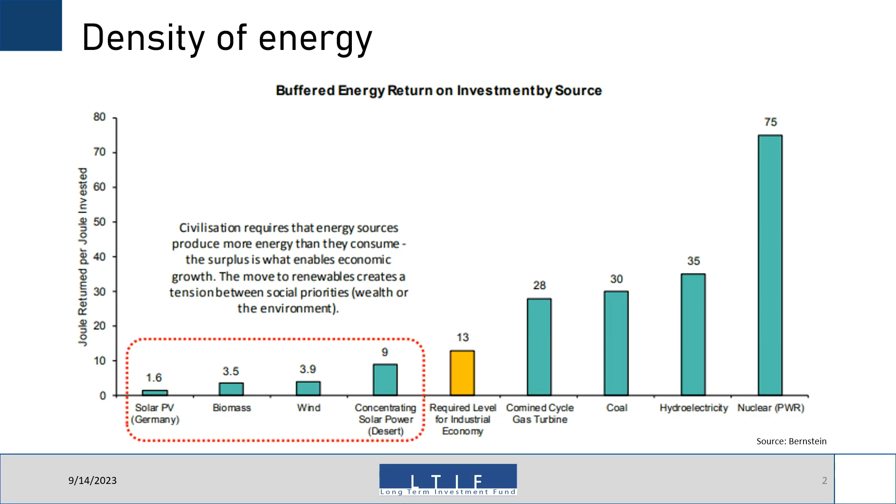You might think the steam engine is obviously something from the old days. I think it was invented in 1760, and the first trains were running around 1820. But you're wrong, because today, out of the electricity we produce, 80% is still done the same way. It's done with steam. Out of this 80%, the majority is with coal, gas, and nuclear fission. The remaining 20% of the electricity is mostly produced with hydropower.

And the reason this is run with coal - why hasn't industrialization happened earlier, because of this, or with biomass? I think human beings discovered fire, nobody knows, maybe 300,000 years ago. And in Switzerland, why did we run steam engines with coal? Definitely we don't have coal, but we would have had forests, probably the only thing. Why didn't it work to run these things over the Passo del Gottardo? The problem would be that the forest would also have been gone very fast, which was actually the case 300 years ago, because it was all cut down for building ships and so on.

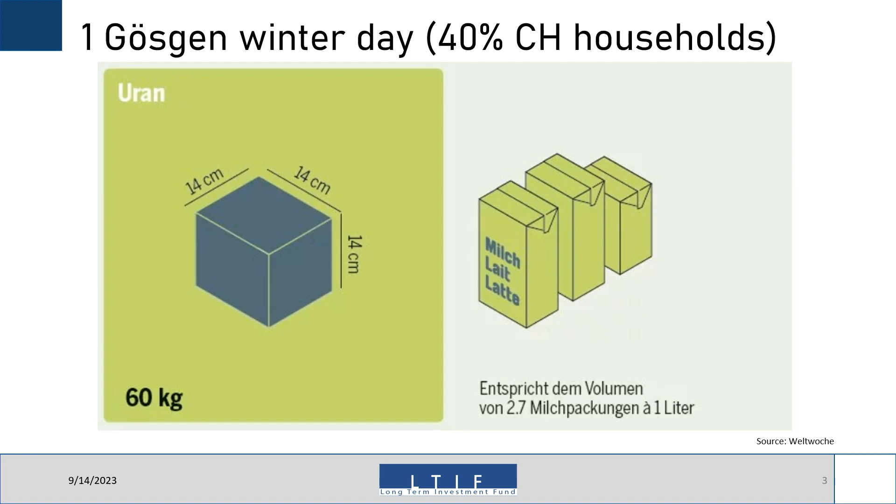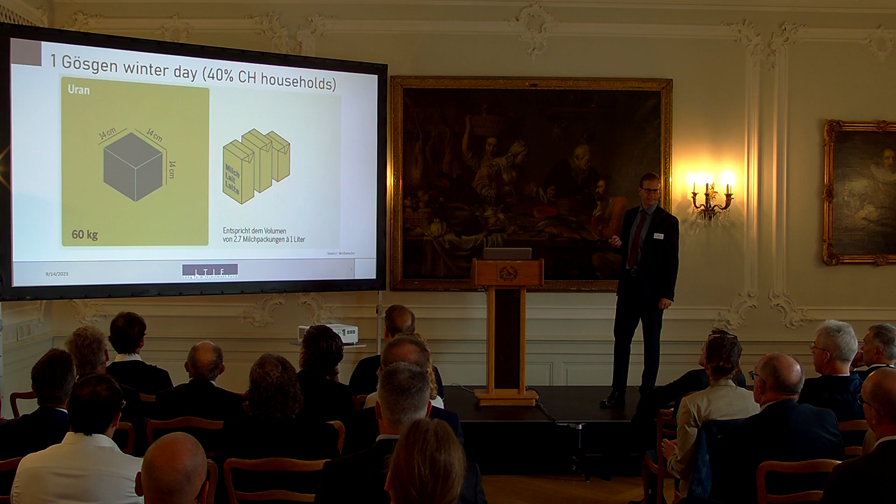So if we take Gösgen on a winter day, Gösgen produces energy for, I think, 40% of households, or 13% of total energy in Switzerland - electricity, not energy, because in every country 2/3 is used by industry, not households. So it would need uranium in the size of 2.7 packages of milk to run Gösgen for one winter day.

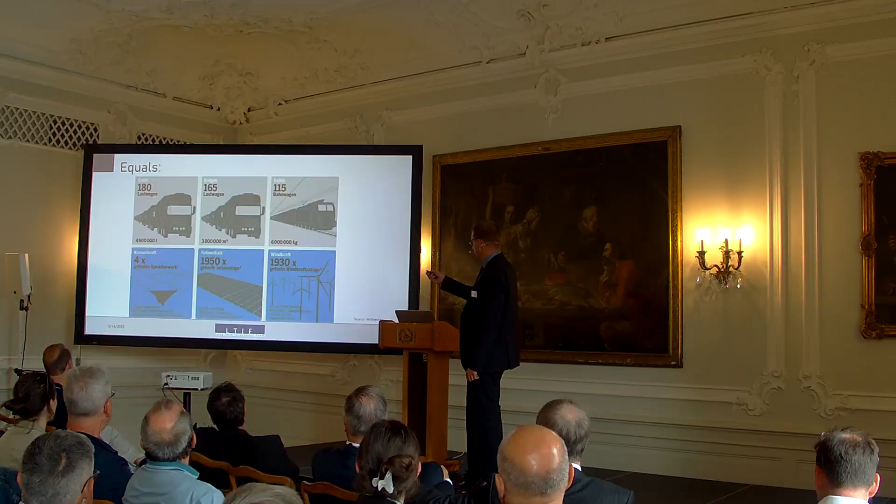It equals 180 lorries with oil, same with gas, 115 railway carriages with coal, and then about 4 times Grande Dixence, which is our biggest hydropower plant, and 2,000 times the largest solar panel field, which I don't know where it is, somewhere in the west, plus some wind energy.

And this is the problem. Alex drags me around the whole world, or whole Europe, all the time, and we were in Vienna driving to Bratislava, and I was shocked.

It was full of wind energy, and obviously people see this, and then they believe it has to produce a lot of energy. And if you tell them that in Switzerland we have 1/3 from nuclear power, apart from the people living in the canton of Aargau, they are surprised, because you don't see it.

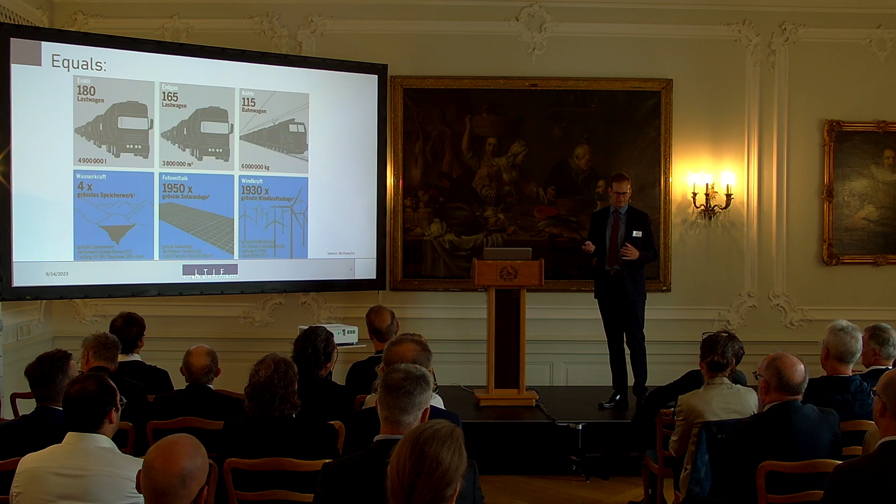That's the reason you don't see it - you produce such a huge amount of energy with a limited space. And obviously, the higher the density of energy, the higher the risk that something can happen, maybe, because that's the effect of it.

It's a bit like, if you're cycling and you have a lack of sugar, what do you eat? Maybe not a salad, but something which has a high sugar content, because obviously you need energy.

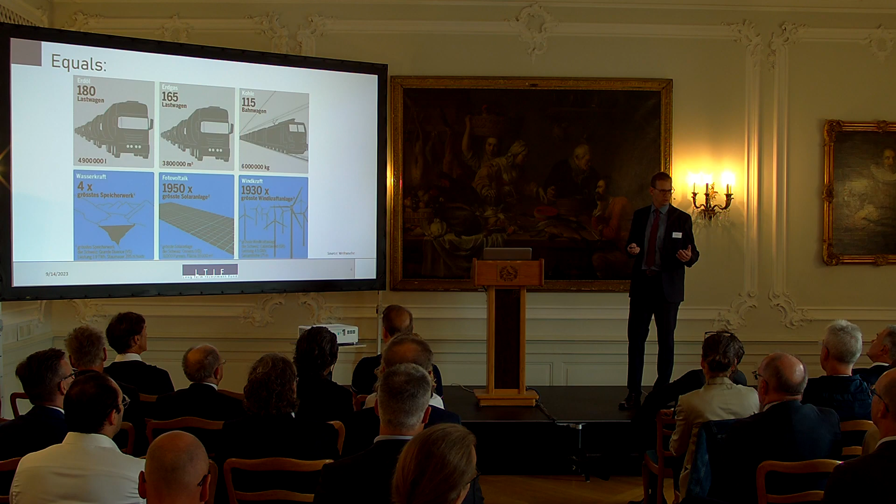So then we want to say a few words about deindustrialization. It's a topic on everybody's mouth, particularly with our northern neighbors. So what is it about?

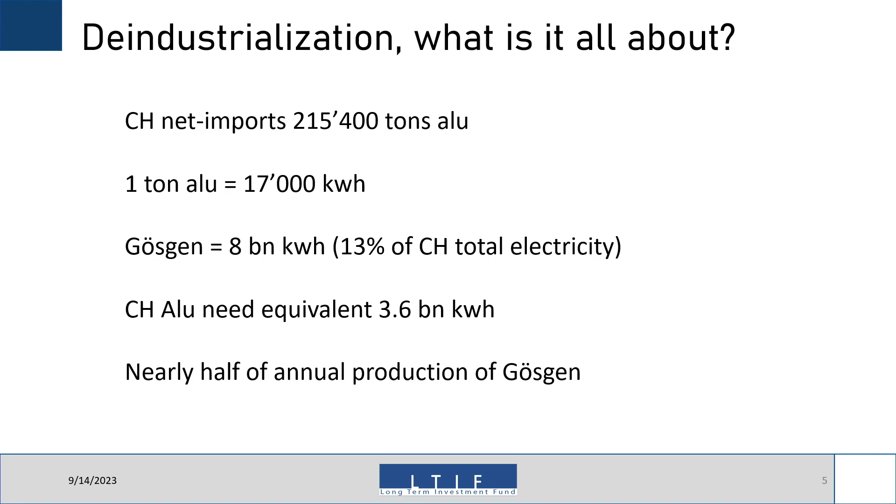Some of it makes sense, because we've been deindustrializing our nation for maybe decades, because our infrastructure is mostly built. So the steel consumption per capita is rather declining, but in countries which are not built yet, which Carlos showed, you have a very low consumption per capita of steel and similar materials. So the steel industry is moving to these countries - it first moved to China, now it's moving to India, and so on.

But let's take aluminium, which is a product that is pure energy. Switzerland, according to statistics, has net imports of 215,000 tons of aluminium. We export some 80,000, import 300,000. So we are not an aluminium-intense economy, because we don't have automotive industry or aviation. I don't know, mostly it's probably packaging, and maybe some high-end products which we re-export.

Doesn't matter - these 215,000 tons, when a ton of aluminium is said to use 17,000 kilowatt hours, and Gösgen produces 8 billion kilowatt hours, the Swiss aluminium consumption is equivalent to half the annual production of Gösgen, which is 20% of the households. So these products are incredibly energy consuming.

And of course, we are happy that we don't have to produce it ourselves. We import it from Russia and China, which are the two biggest producers. But if they don't export it anymore, we would never be able to produce this, because we don't have the energy for that anymore. So now I have a few processes.

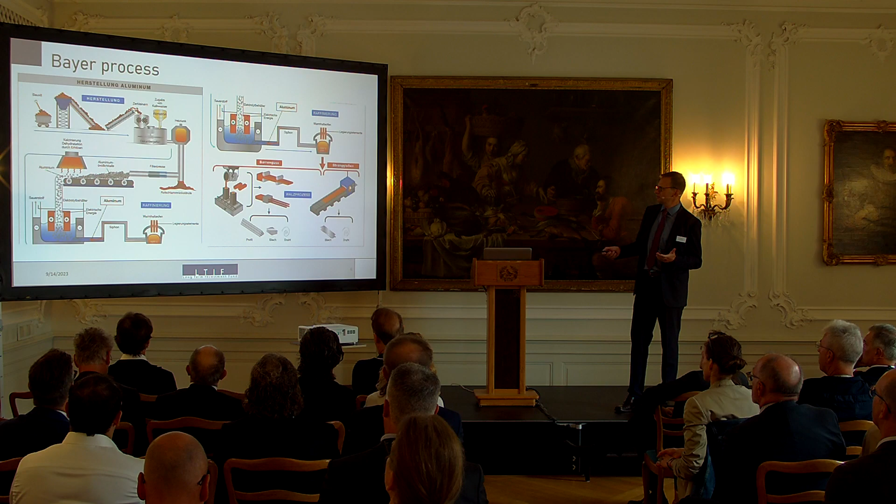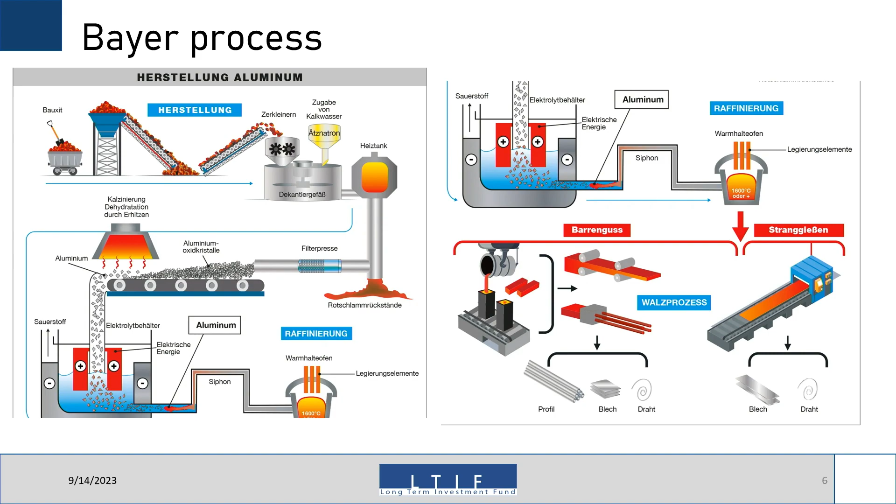A nice thing about these rare earths: in producing alumina, first you get red slag, and 75% of aluminium production is in China, 7% in Russia. And gallium, which people come to me and say is an interesting commodity, have you heard of it? I say yeah, I know, but I don't have a clue. It's said to be used in 5G and whatever, and 75% of these rare earths, where nobody knows what it is, comes from China. Gallium comes from China because the aluminium industry is in China, and we have the red slag, so this byproduct comes out of China.

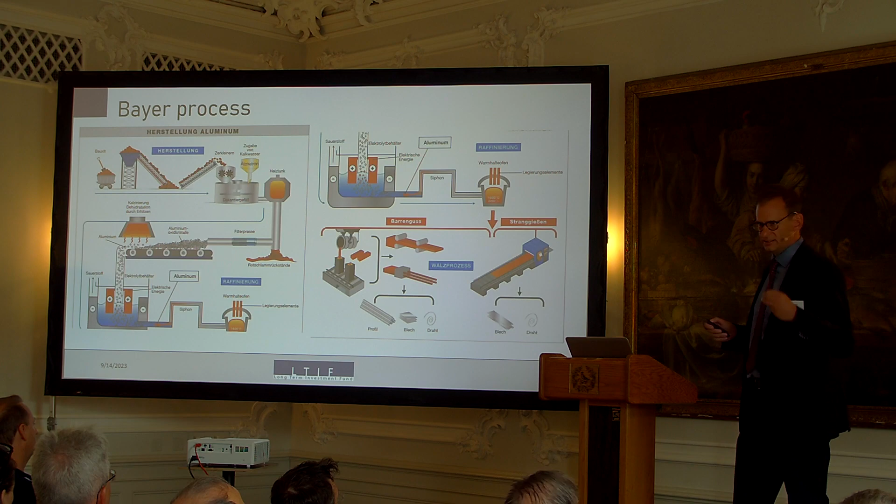Same with vanadium. When a guy comes to you and says he has a vanadium project and mine, call the police because he's a crook. Vanadium is produced out of steel slag, or for example Glencore's chromite smelter. It's not a primary mine product.

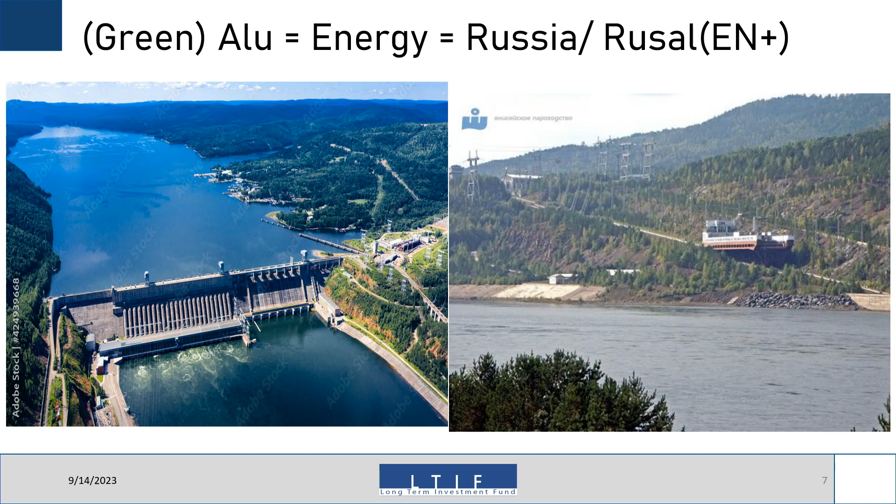So this is maybe the discussion about Russia. This is an interesting dam, Krasnoyarsk. This production goes directly to the aluminium smelter of En+, of Rusal. En+ is the biggest aluminium producer ex-China, 7% of world market. China is over 70%. It has two divisions, Rusal and the hydropower division. It produces 7% of all Russia's electricity with hydropower, and these 7% go directly only into the aluminium production of Rusal.

Russia is a big country. It has an energy mix of a third nuclear, gas and hydro. Taking a third of all the hydropower goes to just the aluminium smelter. So it shows a bit how energy intense this is.

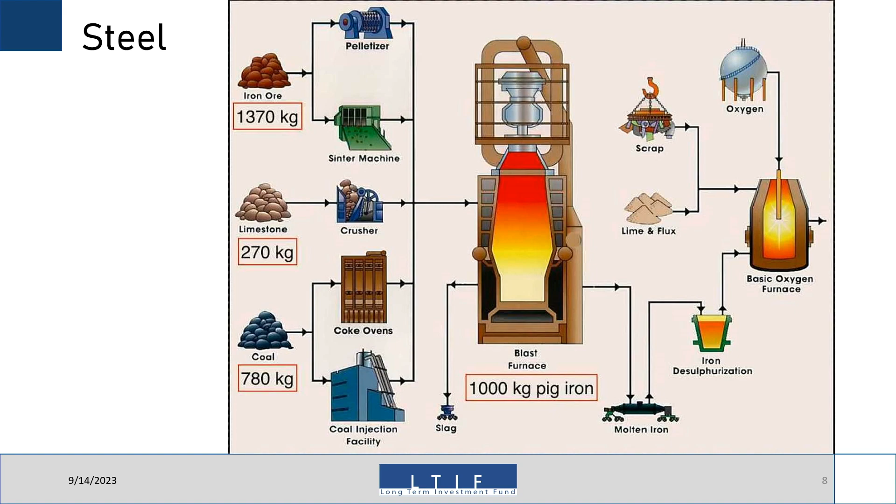Steel - say I ran a steel mill in China. I don't start producing steel or copper cathodes because it would probably be problematic, I'd mess it up. But you need over 2000 degrees, and your oven at home is a tenth of that. So you'll never get such high temperatures with, for example, the normal electric oven.

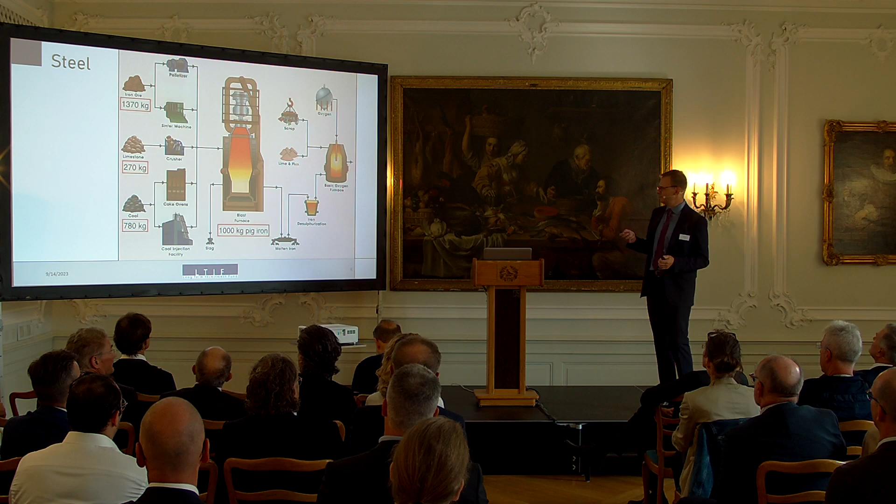It's even a problem already in the pizzeria. With these modern ovens, you don't get a good pizza because you need higher temperature. That's the reason why you can't eat pizza outside of Naples, probably.

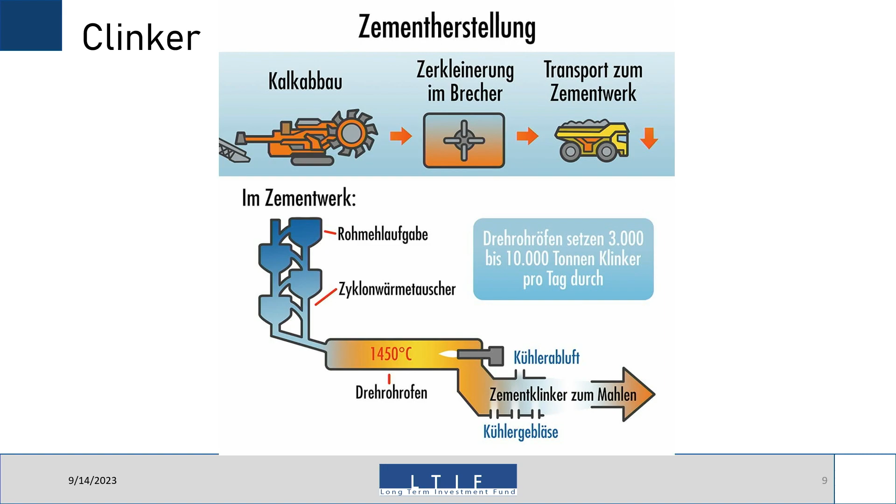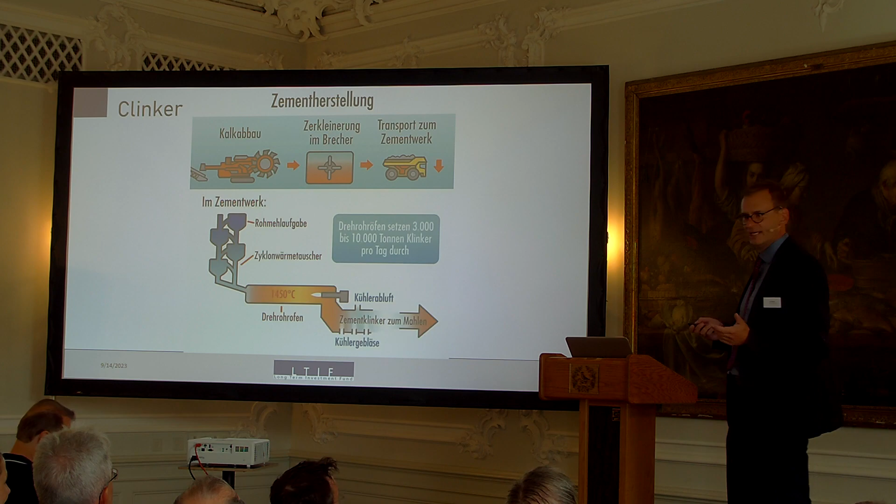Cement in Switzerland - the discussion is you need 1400 degrees for producing clinker. You don't get 1400 degrees with something that has no density of energy. That's the reason why Holcim or cement production is so CO2 intensive, because it needs the energy and the heat. So you can stop consuming cement, or maybe build the hydropower dams with biomass, or who knows.

Then ammonia, a product probably nobody has heard of, or many people have never heard of. It goes into fertilizer. Did you know? It's surprising. The global ammonia production - BASF in Germany, you might have heard about the problems with gas and electricity - consumes around 2% of global energy. That's more or less the same as the whole aviation industry, just going into ammonia production.

Without ammonia, agricultural yields would probably go down 50% plus, which correlates with the world's population. That's a bit the chart Carlos showed, that world population correlates 1-to-1 with the availability of energy. Fertilizer is pure energy - it's natural gas, nitrogen.

And then I come to the new technologies and stuff like that - wind energy. Wind energy, I think it's said some Greek guy like Heron invented it, and the first yielding windmills were in Persia, 9th century after Christ.

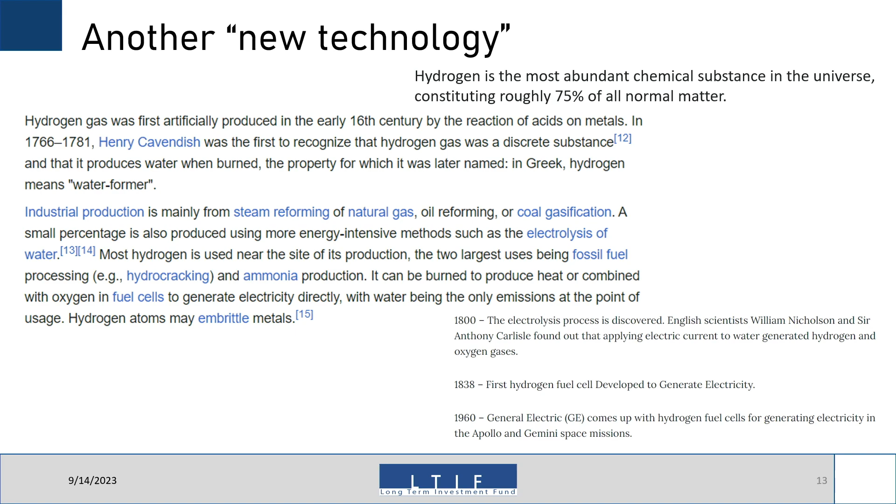Hydrogen is an interesting thing. Now everybody talks about hydrogen. I think it was first produced in the 16th century, and it's produced mostly from natural gas. Of course, hydrogen is complete bullshit for energy, because the efficiency is 30 to 40%. What makes sense is using energy from wind and solar that you can't otherwise use, as a sort of storage. But the only way to produce hydrogen is dividing water and oxygen, and you need natural gas or another source of energy to do this - it's not a form of energy in itself.

So everybody talks about it. The first fuel cells were 1840, the electrolysis process more than 200 years ago, which we use today for many things - copper cathodes, aluminium, and what I said, hydrogen from green hydrogen stuff. Why did it take so long if it's so good?

If you look at the biggest hydrogen producers, I've listed them - you can buy funds like ours. It's Nutrien, the biggest fertilizer producer, Shell, Air Liquide, Koch Industries, which is like a Glencore in Germany - it's the second biggest non-listed US company after Cargill, something similar. Icahn Industries, which is Carl Icahn's, invested in oil companies. Linde, then Aramco, Kuwait Petroleum, Qatar, Sinopec - one of the two big state-owned Chinese energy companies.

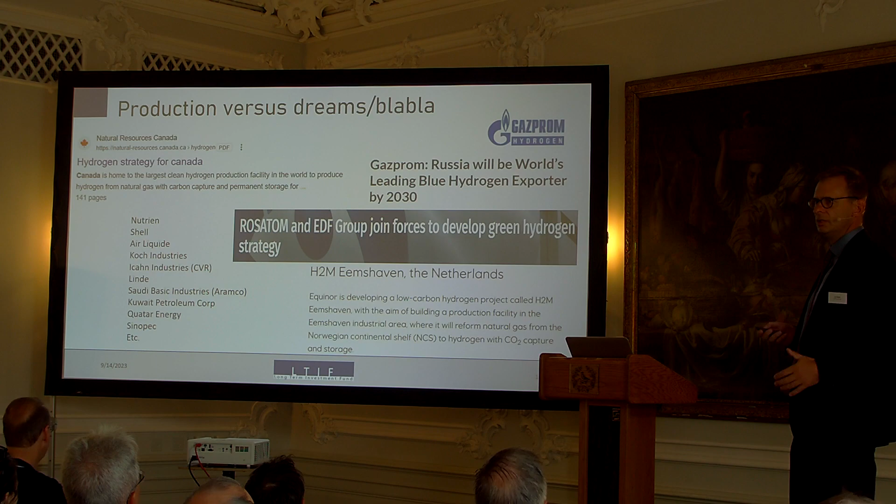Gazprom will become the largest hydrogen producer - unfortunately the pipeline to the west is gone, now they export it like everything to Asia. Rosatom, EDF, it's all going on. CNQ, a position in ours, is one of the biggest hydrogen producers in the world, because they have stranded gas out of nowhere in Alberta that you can't use, so you convert it into hydrogen. Or the oil industry is flaring a lot of gas, which is obviously a waste - so instead of flaring, you convert it into hydrogen, which makes sense.

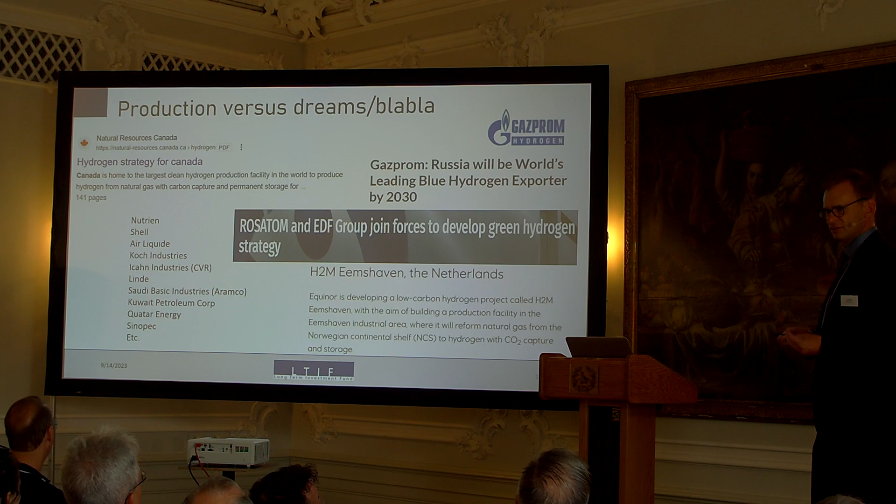...in 1938 in Germany - only '38, I think by some Austrian Jewish lady, who then had to flee Germany. So maybe that's not good advice if you want to be a dictator - getting rid of the brainiest people in the country. So that was '38. Four years later, the chain reaction was discovered by an Italian, in '42. Three years later, the nuclear bomb had already been detonated - this is not hundreds of years, just 3 years. In '54, the first nuclear reactor was connected to the grid in Russia, and in '56 in the Western world, in England. So this went pretty fast.

So it seems that when something really works in terms of energy density, things go fast. And maybe it will remain like this. So that was my presentation.